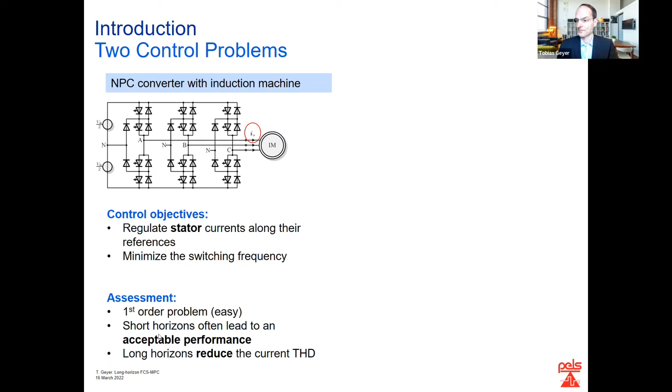Maybe more interesting are problems that are a little bit more complicated. Problems where you put a filter, a sine filter, an LC filter between your converter and your machine. You can also think here of having maybe a transformer. You would have the transformer impedance and then a point of common coupling would be an equivalent problem. And here you need to control 3 quantities in alpha, beta, not just one quantity. So this is a more complicated problem and also more interesting.

And here we will see that long horizons really do make a huge difference. So they lead to an improvement of a factor of 10, so an order of magnitude, compared to a horizon of 1.

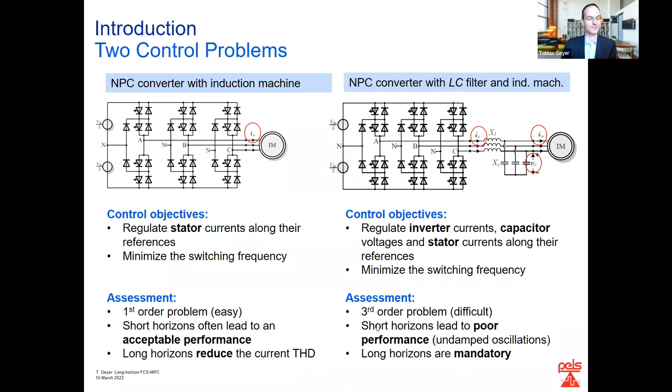Now, the way we usually formulate and solve these control problems is we say we have an inner current loop. That is typically formulated in a rotating coordinate system. Let's call it DQ. So we need to know the angle of a rotating coordinate system. So we would have a D-axis and we would have a Q-axis. And this would be rotating at a certain angular speed, omega frame. And that turns AC quantities into DC quantities.

So that means here we have sinusoidal quantities. That's a bit awkward to control, to track. But here we have DC quantities. And these DC quantities we want to bring towards their references. References would have a star. So this is always, in my nomenclature, a reference. And then we have here a current controller working in DQ with 2 components.

And usually we have one for the d-axis and one for the q-axis, and then there's some cross-coupling, some decoupling with some feed-forward terms. And that gives you a voltage reference in dq, which we translate back into ABC, into the three phases. And then we have a modulator, pulse width modulation, that translates this into switch positions. So these would be the switching signals in the phases A, B, and C. So I'm using the Anglo-Saxon notation. U means switch position, V means voltage, and U is not a voltage.

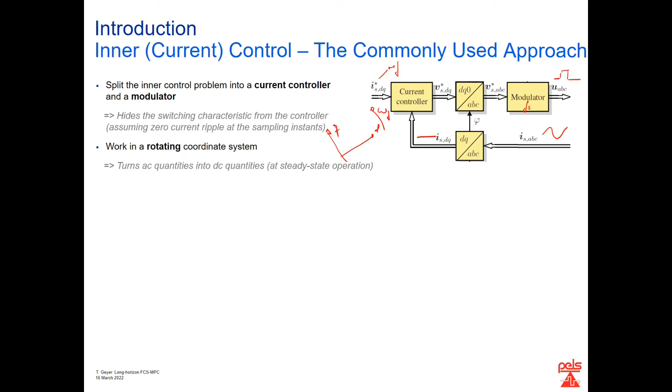Now the way we do it is we typically formulate the current control problem in a rotating or field-oriented control framework. So I've indicated already up here, but you have the same down here. And on the machine side, we would have a rotor flux, and the d-axis is aligned with that rotor flux. And then we have a magnetizing current that magnetizes the machine. And we have a torque producing current that produces torque. And you can have these current controllers as a proportional integral controller, or you can go for deadbeat.

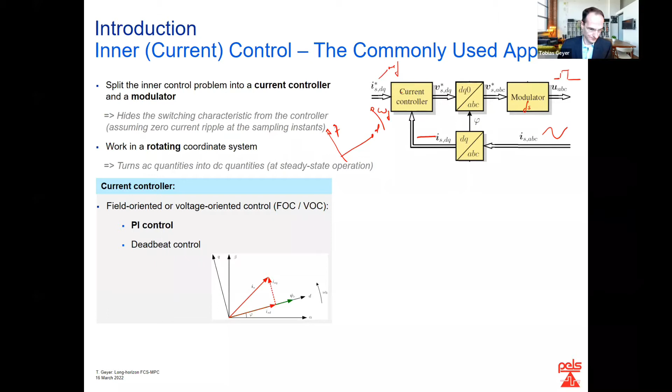Now, in terms of modulator, typically we would use carrier-based pulse width modulation. So we would have, in case of a 3-level converter, an upper carrier, triangular shaped, and the lower carrier, triangular shaped, between -1 and 1. We would have a reference signal, this modulating signal here. This we would feed in here. And whenever we have an intersection with natural sampling, we would have a switching transition.

Now, space vector modulation is similar. We just don't have carriers, but we sort of analytically compute the on and off times for the respective voltage vectors. Or we could go for discontinuous PWM, where we would maybe freeze the switching here when the current, let's assume power factor 1, when the current and the voltage is high, and we would also freeze switching here. So one phase would be frozen and the other 2 phases would be switching. You get lower switching losses, but you pay a bit of a price in terms of harmonic distortions.

And then there's programmed modulation. So most notably, there are optimized pulse patterns. That means we have a very different approach. We say we have a modulating signal. We have a modulation index, sort of an amplitude of the voltage we would like to create. But we then say we have a certain number of switching angles, let's say 3 over the first 90 degrees. And then we ask ourselves, what is the optimal position of these 3 switching angles so that we minimize the harmonic current distortions. So we compute with an optimization problem the position of these 3 switching angles so that we minimize the harmonic current distortions for this given modulation index.

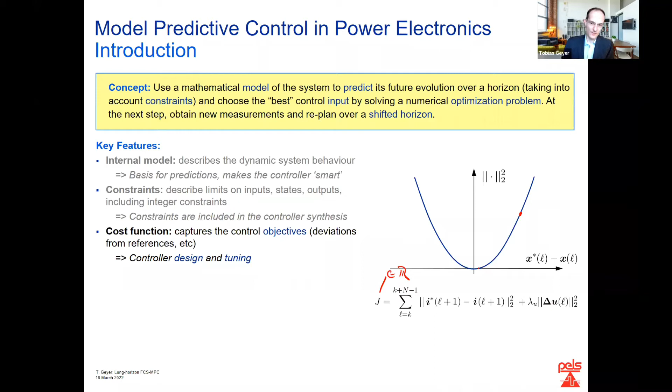And we might say that a small deviation, a small error here is penalized very little, so almost not at all. But a large error, we could say, is penalized a lot. So this is a sort of quadratic cost function. We don't care much about small errors, but we really want to avoid the big ones. And then we have this term here, which effectively tells us that the changes in the switch positions, which is the switching frequency in a way, should also be small. So this does the tuning of the controller. So we might have to tune this lambda here.

And then there is numerical optimization. So in general, we are not able to analytically, in the form of equations, come up with a control law. We need to solve it step by step. That means we have a certain feasible set, a certain input space that is defined by our constraints. And we want to find the sequence of input variables we would apply to our system so that the cost function that tells us how well we meet the objectives is minimum.

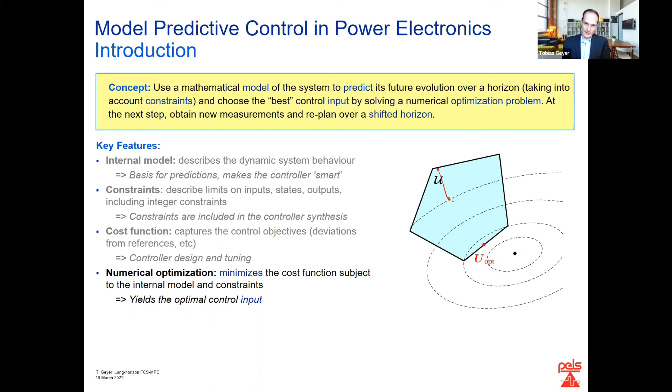So these ones here are level sets of our cost function. The closer we are to this point, the lower the cost, so the better it is. And we might start somewhere here and then move step by step orthogonally to this level set till we hit this constraint here, the bound of the feasible region. And then we know that, if certain properties are fulfilled, in this case convexity, that is then the optimal switching sequence.

And then we do this. So we formulate our problem over a certain horizon. Let's say we look 5 steps ahead or 6 steps. We compute the switching sequence or the sequence of manipulated variables over this horizon. But out of this long sequence, we only implement the very first element. So only the first element is given to our converter. And then at the next time step k+1, we make new measurements. We make new estimates, and we redo the whole thing over a shifted or receding horizon.

So you might say this doesn't make much sense. I mean, why don't I use all the rest of the control sequence? And the reason is simple. If you applied the whole sequence, you will only be able to act again here. So if a disturbance or something happens at this point here, you're not able to react. You have to wait till here. But with this receding horizon policy, if the disturbance happens here, you will be able to act already at the next time step. And you will see the effect this disturbance has caused by measuring or estimating the states.

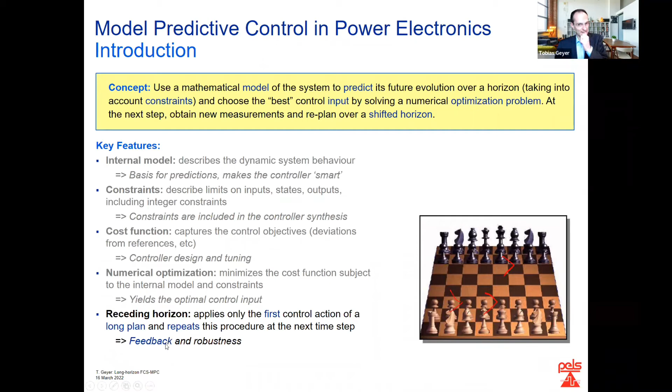So this receding horizon policy adds feedback. That's the difference to open loop control, where you apply the whole thing in an open loop fashion. Here you apply the first element, so this is closed loop control, giving you feedback. And that really gives you robustness. If your parameters are not perfect, if your model is not perfect, if you have disturbances, you will be robust to these disturbances. You will be able to counteract them. Okay, so that's the basic philosophy of MPC.

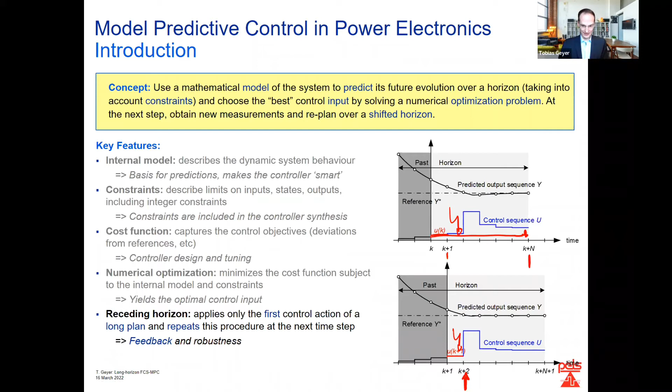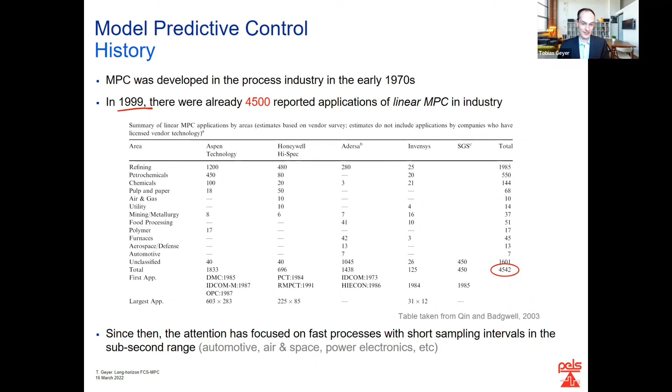The main reason maybe is that the sampling intervals were really long here. They were in the range of minutes, tens of minutes, in some cases even half an hour. In the automotive, air and space industry, we're talking about tens or hundreds of milliseconds, and power electronics is in the range of a couple of microseconds. So we needed a tremendous speed up in computation time.

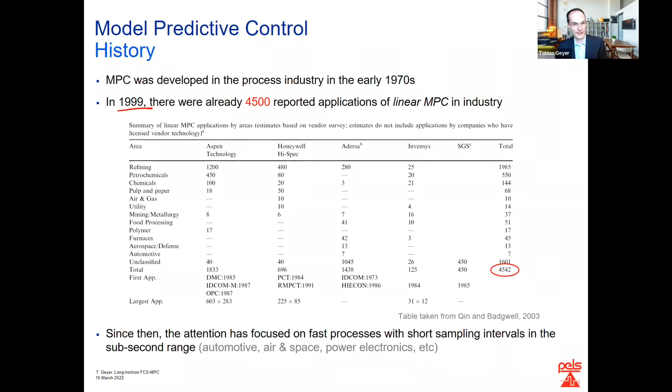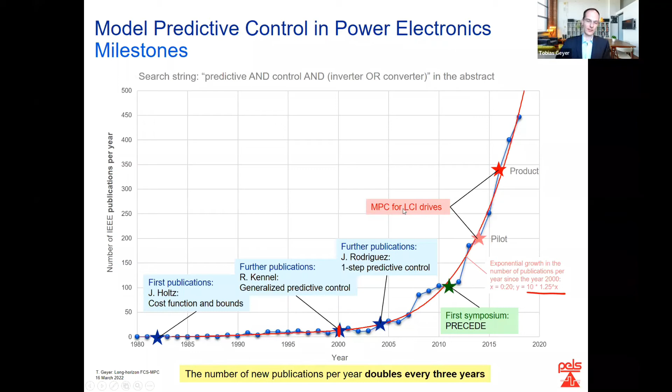They have nothing to do with finite control set MPC. This predictive control of load commutated inverter drives is a very different method. We control the rectifier and the inverter in one shot, and directly manipulate the firing angles of the thyristor bridges. Then there is model predictive pulse pattern control, the second predictive control product in industry. Again, it has nothing to do with finite control set MPC. Rather, it is based on optimized pulse patterns, which are pre-computed and then tweaked online by modifying the switching instants.

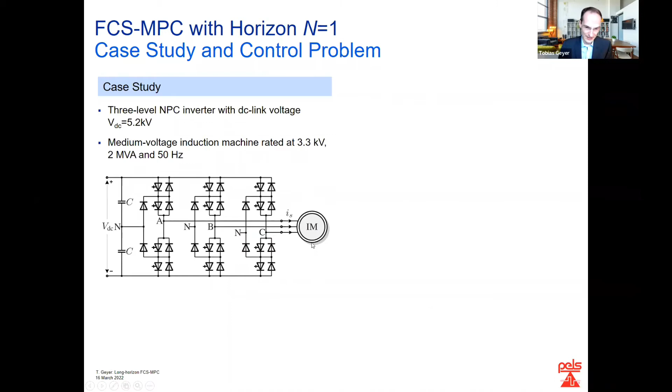Good, so let's start with the simple version of finite control set MPC with a horizon of one step. And again, we look into this case study, this 3-level neutral point clamped inverter driving this induction machine. But a 2-level inverter and any other machine would be equally fine.

And the problem is that we want the stator current that we measure to follow its reference, that would be a sinusoidal reference at steady state, by manipulating the switch positions in the 3 phases A, B, C. So we need to make here a choice of -1, 0, and 1 in the 3 phases. And we don't want to switch too much, particularly not for these high power converters.

So the way to do it is we simply say, I want to map what I want to achieve into a cost function. And what I want to achieve, I want my currents to follow their references. So I penalize the predicted deviation of the currents at the next time step. We are at time step k. The next time step is time step k plus 1. This deviation from the reference is penalized.

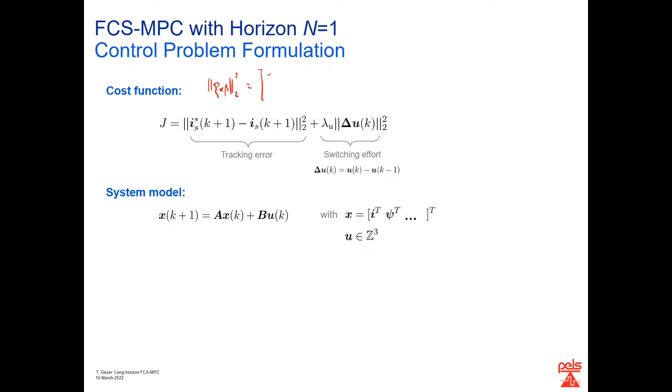And you might ask yourself what this squared 2-norm is. That really just means if you have a variable xi, let's say in alpha beta, so you have xi alpha and xi beta, and you take the squared 2-norm, that means you take the first component squared plus the second component squared. That's all it does.

I'm not sure why my tablet produces these horizontal lines. I'm sorry, they're not meant to be there.

So we want to get the tracking error small, and we want to switch little. And switching means between the previously applied switch position and the switch position we're choosing now, we want to have as small a difference. So when we reapply the same switch position, this would be 0. If we switch in one phase, this would be 1 times lambda u. If we switch in 2 phases, this would be 2 times lambda u.

And you see already we need to come up with a lambda. That is the trade-off between good tracking and low switching. And in general, you can't have both. So we need to come up with a good lambda.

Now the system model, you can pick any model, any load, any converter you want. In this case, I assumed it to be linear, but it does not need to be linear. So it's a simple state space model. Given the states now and the input now, we can predict what the states at the next time step will be. Could be currents, could be fluxes, could be capacitor voltages, and so on.

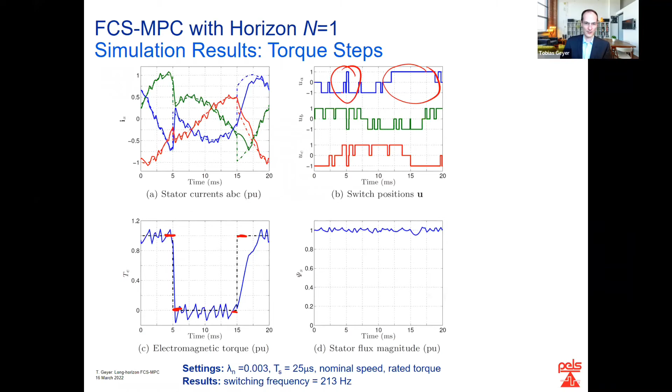You have here your torque, and you have here your switch positions UA in phase A, in phase B, and in phase C. And that torque step is there to be applied. Should be coming up now. Now the torque is being ramped down. That happens very quickly. We're at zero torque, and then the torque step back upwards comes, and that is a bit slower because of the lack of voltage margin. But you see already the prediction horizon is so short that it's actually a bit of a surprise that this works well.

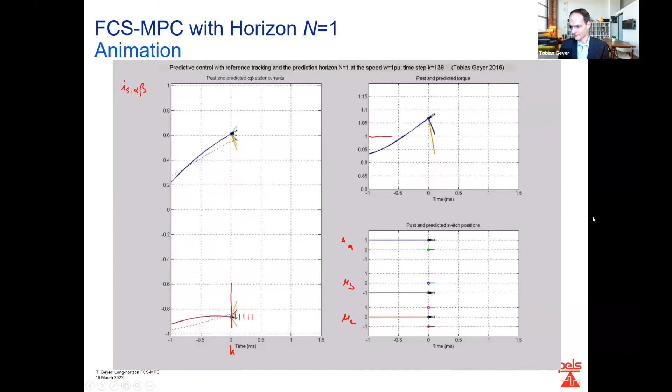Now, summary: horizon 1. Prediction horizon is 1. We use a load or a machine model. We use a converter model. This lambda u provides a trade-off between tracking and switching. It is very simple, both from a concept point of view as well as computationally, because you just try out all the different possible options you have. It is extremely versatile, so you can use it for any problem, any topology, any control objective you have.

But it doesn't work in some cases so well. So its performance in general is fairly average. In many cases, it is worse than classic modulation using carrier-based pulse width modulation. So we need something better. And the something better is finite control set MPC with long horizons. So let's look into these long horizons.

And first, let's understand why it's difficult to have a long horizon. So we have the same problem formulation here. We want to track these measured stator currents and move them along their references and directly manipulate the switch positions. So we do that in alpha and in beta over the time axis. And let's assume we are at these points here.

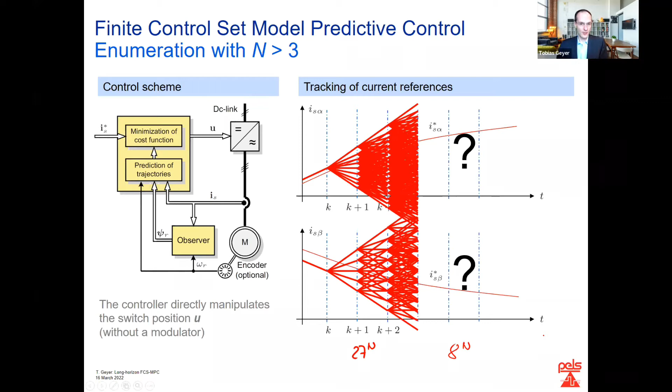So we get this combinatorial explosion. So we have 27 to the power of n combinations, where n is the length of the prediction horizon. Okay, you say, I'm interested in 2-level converters, then you would have 8 to the power of n. It's almost as bad. So this is hopeless. So it's a hard to solve optimization problem. I mean, you have an exponential increase in the computational complexity as you increase the length of the horizon.

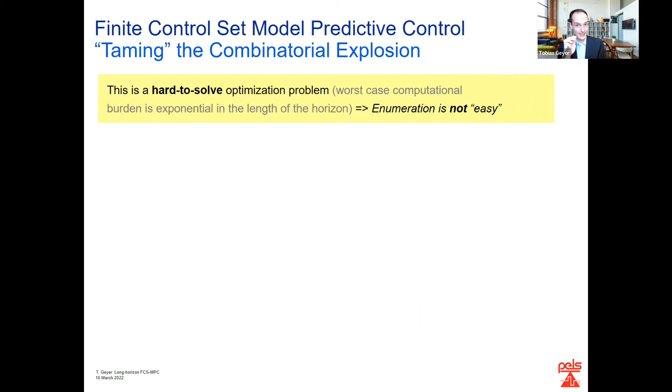So enumeration is difficult. Enumeration is not easy. Trying out all the possible solutions actually leads to a very difficult optimization problem, unless you have a horizon of 1, then it's very easy. So we can apply heuristics. So we can try to limit in an ad hoc manner the number of switching sequences we have to explore.

There are different ways to do it. You could say, I'm happy with a horizon of 2. I could only consider switch positions that refer to voltage vectors that are close to an ideal one. So I could say that I have in alpha and in beta such a hexagon of voltage vectors, and somehow I determined that I'm in this modulation region, in this little triangle. So ideally, I would like to be here. You could say, then I just need to look at this one, that one, and that one. You can do that.

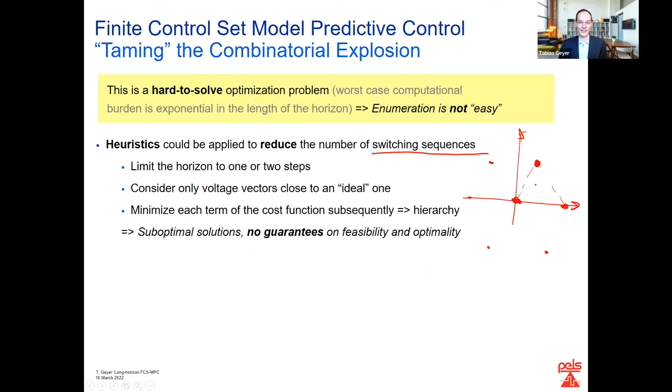You can try to have some hierarchy. You can try to minimize first one part of the cost function, then another one. But in general, there are no guarantees that this problem can be solved, and there's certainly no guarantee that this is done well. And well means optimality. So you will give up optimality and you don't really know what you get. And it's easy to construct counterexamples. So for each one of these methods, you can create a case where you can actually show that this idea is really bad, even though in general they might work.

So the question is, is there a better method? Is there a method to solve the long horizon finite control set MPC problem where I have a guarantee of optimality and I have a low computational burden? And the answer is yes, as you can imagine. And it's called sphere decoding. It's a branch and bound method, and I will now present this to you.

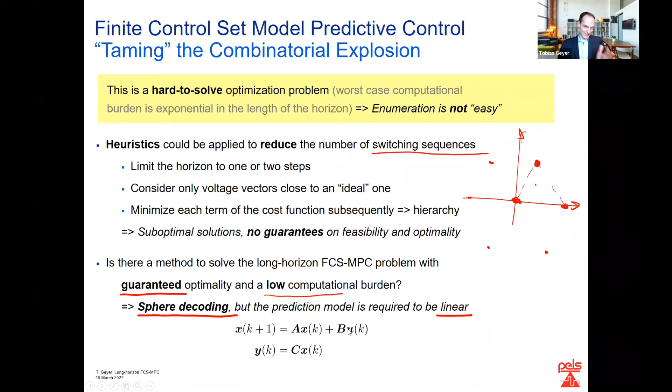There's one little footnote, and that is the prediction model is required to be linear. So you need to have a linear state space representation with matrices A, B, and C. You can't just have here a nonlinear term. So that is a restriction. I would say it's a significant restriction. But if it is linear, or you can formulate it as a linear problem, then there's sphere decoding.

So let's formulate these long horizon MPC problems. And let's ask ourselves first, are our problems more linear or are they more nonlinear? So is that really a problem that we have a linear system representation? So pick a system. I would say these components in here, they are effectively linear. The inductor is more or less linear. The capacitor is linear. Maybe there is some saturation of magnetic material. Maybe the torque is nonlinear. But the majority is really, it is mostly a linear system.

We have multiple inputs, multiple outputs. So you have your switch position in phase A, B, and C, and you want to control currents and voltages, or currents or fluxes. So a MIMO, multiple input, multiple output system. MPC can handle that well. The main nonlinearity we have is the actuation. So these switch positions, these on-off, this 1, 0, and -1. That is our nonlinearity, at least I would claim that. So it's a nonlinear system, or mildly nonlinear system, with integer inputs.

It is accurately known. We do know our system. Maybe not when we are grid connected, then we have to maybe estimate the grid impedance. But in general, we have built this filter, we have built this machine, we have a fairly good understanding. Typically, we have less than 10 state variables, and typically we have 3 variables we manipulate to achieve our control objectives.

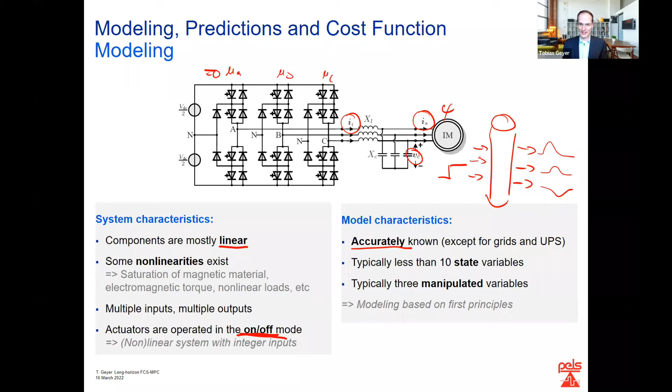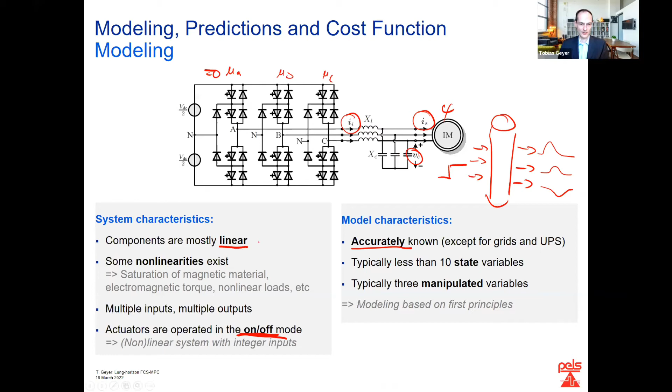And you don't have just 10 state variables, you have hundreds of thousands. So highly unknown models with lots and lots of state variables. In contrast, we have almost a heavenly, a blissful situation with just a few states and a fairly well-known, almost linear model, except for the on-off characteristic.

So what we do is we do these predictions. We work with the discrete time axis, and we have our state space system. So we have a certain state, we have measured it. Let's take a tentative input. This notation means U of k; it's just a more compact notation. This is the switch position at time step k. This is the state at time step k.

So given this input, I can make a prediction what my states are going to be after one time step. And these are always vectors in general, not just one component, but 10 or so. At the next step, I can ask myself, if I have now predicted the state and I'm going to apply the switch position, I can make a prediction what the next vector of state variables is going to be like.

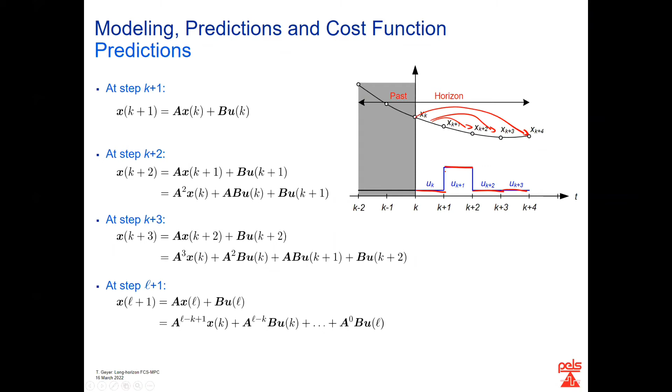And then I can put the previous prediction into this one here. And then I can get the mapping from the initial state to the state at time step k plus 2 using switching at time step k and k plus 1. And this I can repeat. So given my inputs, which I have to choose, which I will optimize over, I can make a prediction what future states are going to be, and if you have the states, you can also compute what the outputs are going to be like. The outputs are then simple linear combinations of the states. Okay.

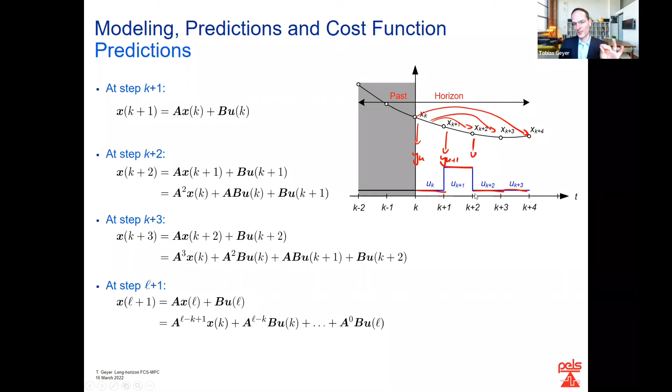Now it's important to understand how you can model and how you can predict the future. Then we want to see how do we choose these switching sequences? What is optimal? And for this, we need a cost function. The cost function maps what we want to achieve into a number, into a scalar, into this J. Commonly used cost function terms could be the deviation of the predicted current from its reference, let's say at the next time step. And there's a simple physical underpinning under it.

So this is here in alpha beta, but in general, in the A axis you want as small a current ripple as possible. In the B axis, you want as small a current error. And in the C axis, you also want to have a small current error. And you can show very easily that minimizing the current error in A, B, and C is the same as this cost function.

Well, maybe if you don't mind, hello, could you mute your mic, please? Naman Singhal, can you mute yourself? Naman Singhal, can you mute your audio?

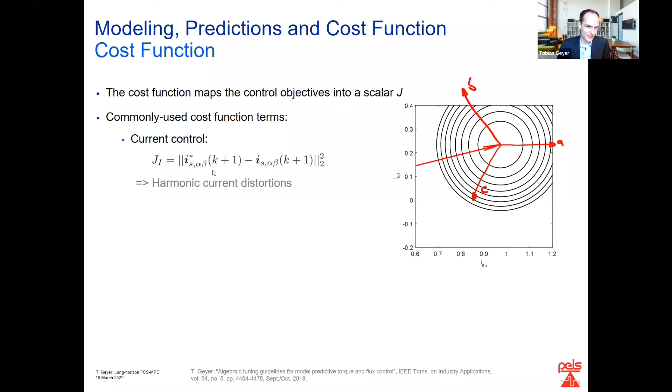So we want to get the ripple in phase A, B, and C small. And this directly leads to this type of cost function. So you get these concentric level sets. You want to get the deviation in alpha beta from the reference as small as possible. So this minimizes your current THD. You could also say, I'm interested in the torque. So I want to follow a torque reference, or I want to follow a stator flux magnitude reference. So this could be a direct torque and flux control. This could be a direct current control.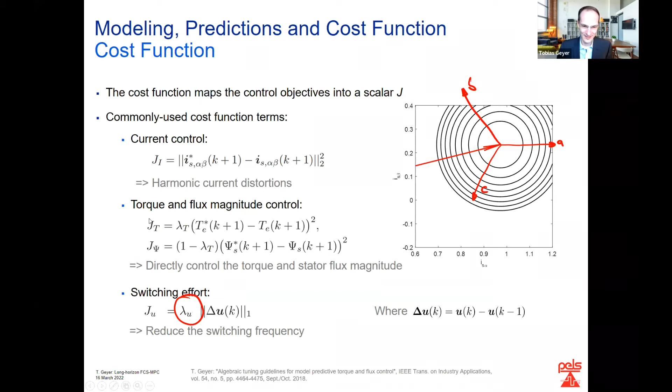And then you want to get your switching effort small. This we have discussed already. So you need this penalty on switching. Maybe coming up with a good cost function is not so easy, but usually you can base it on physics. I mean, you can start with a THD, or you can say, I want to have good torque and flux magnitude tracking, for example.

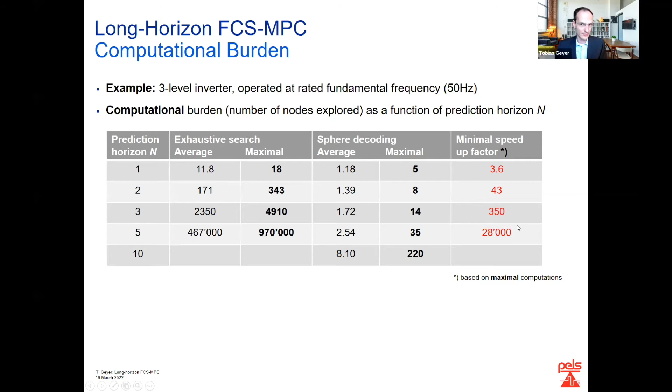And you also see it here when you do this prediction horizon and you use the classic exhaustive search. So for a horizon of 1, we would typically need to look at 18 elements, not at 27, some are not allowed. Horizon of 2 might be 340, 3, 5,000, 5, a million, and then I was not able to compute things anymore. But with this sphere decoding, it's just a few. So you get a tremendous reduction in number of nodes, so a tremendous reduction in computation time.

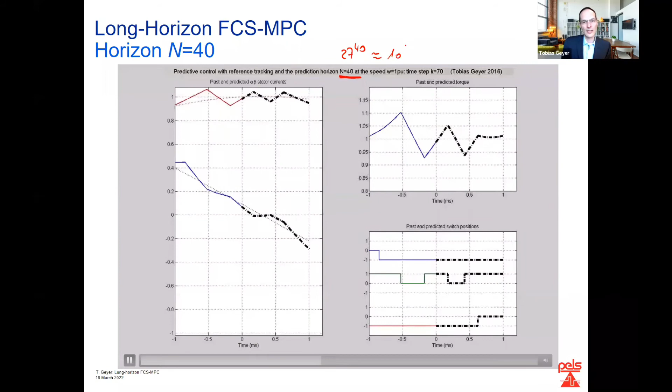So how does that look when you use it? This is an example with a horizon of 40. So we have 27 to the power of 40 combinations. That's maybe something like 10 to the power of 80 combinations that we can solve here in a couple of tens of microseconds. You see here we are at time step 0. We have a sampling interval of 25 microseconds. We have 40 steps. So the length of the prediction horizon is 1 millisecond. And you see this receding horizon policy in action. Effectively, it is nicely moving through. Because of the switching, every now and then we have a discontinuity. We add a switching transition or we remove one, but largely you see it nicely moving through.

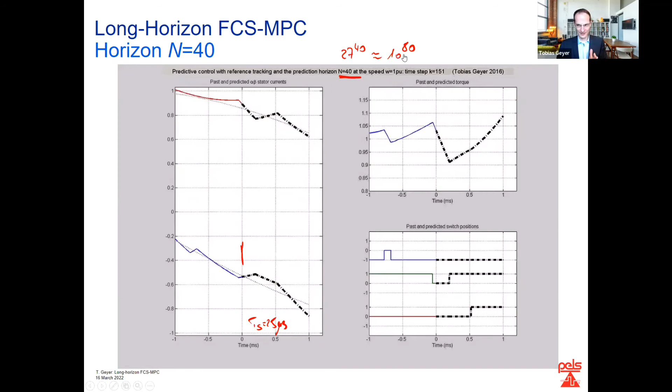Now, this number of combinations, this 10 to the power of 80, that's the number of atoms in the observable universe. So that's an incredibly, incredibly high number. It's absolutely impossible to try them all out. But with the sphere decoding, we have proof that we have found the optimal solution by just exploring a few tens of those choices.

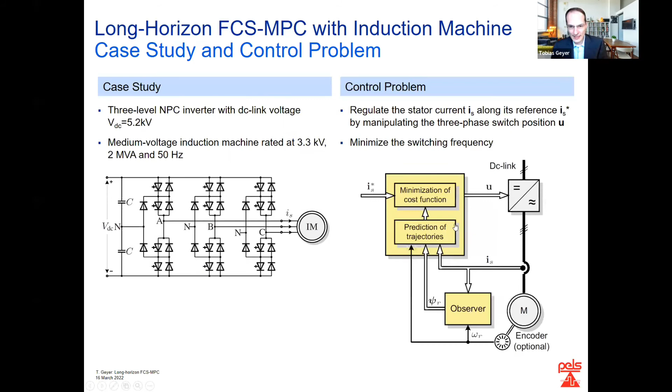Now, if you apply that to induction machines, like this example we have had previously, and we have here the tracking of the current, you compare it with the state of the art, in this case, let's say space vector modulation. So omega means nominal speed. Let's say 50 hertz fundamental frequency, nominal torque, switching frequency of 250 hertz. You see this carrier-based or space vector modulation doesn't look so good. I mean, the current THD is quite bad. The harmonics are huge. These are sidebands, but the carrier frequency is at 450 hertz. So it would be here. So these would be sidebands, but it's hard to distinguish them.

You can go for optimized pulse patterns. You can almost halve the current THD while having the same switching frequency. So we just switch in a bit of a smarter way, and it has a tremendous impact on the current ripple.

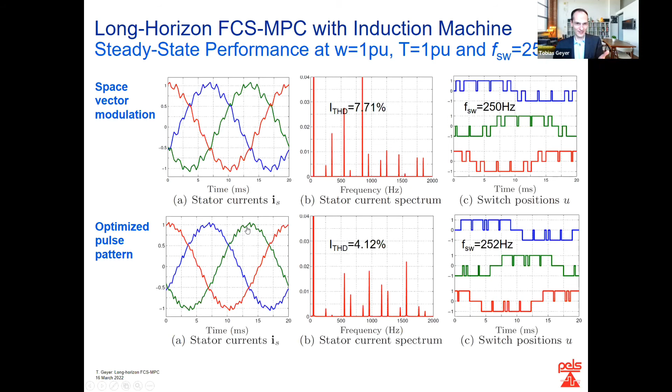So these ones I will maybe skip in the interest of time, but what I effectively want to tell you is that tuning is a bit tricky because you have two things you need to tune. You need to tune the penalty on switching, the lambda u, and you need to tune the sampling interval. Both are effectively parameters. And if you just do Monte Carlo simulations with a horizon of 1, you're typically worse than space vector modulation. You need a horizon of 10 to be as good as space vector modulation.

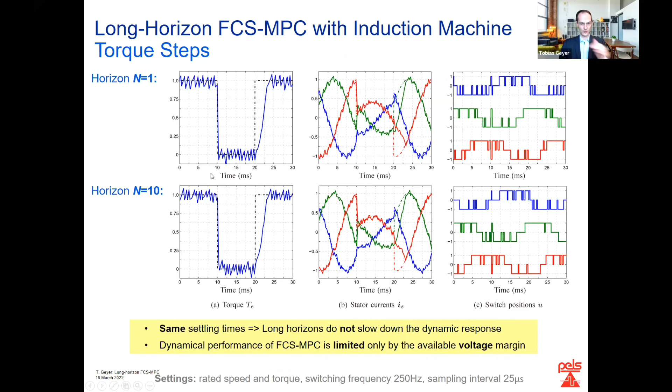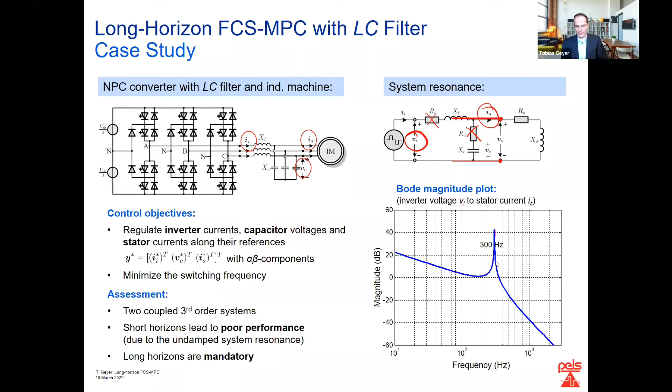And you see the transfer function from the voltage harmonic at the inverter to the stator current here has this resonance peak. In this case, around 300 Hertz, that's determined by the filter parameters and the leakage reactance. So you can imagine that this is highly undamped. So if we just apply the controller here without knowing about that resonance, we will get huge oscillations.

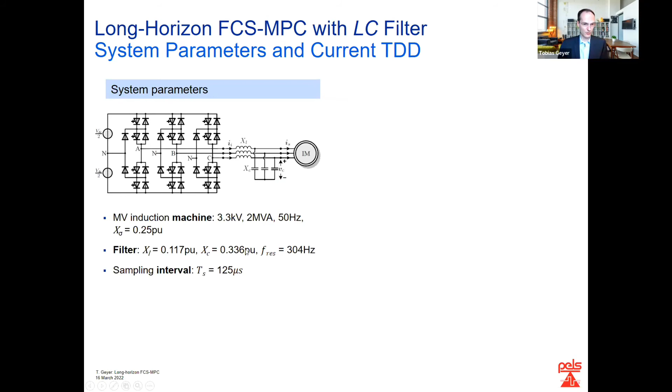Now, I picked some parameters for the filter. These are typical parameters we would be using. I have a relatively long sampling interval. And if I then plot the current THD versus the switching frequency, and I go for a horizon of 1, you see it works really badly. You need, at least for this case, a relatively high switching frequency, and you get a really high current THD at the terminals of the machine.

A horizon of 5 helps a lot, and the horizon of 20 helps even more. So you get here a reduction of almost a factor of 7 to 8. A tremendous improvement. Effectively because the damping is taken into account by your controller. So long horizons really, really help in this case.

So you see it here, you have inverter currents, they look awful. Capacitor voltages look okay, and the stator currents are really nice. It's effectively a very, very low current THD. You get the switch positions, very flat harmonic spectrum.

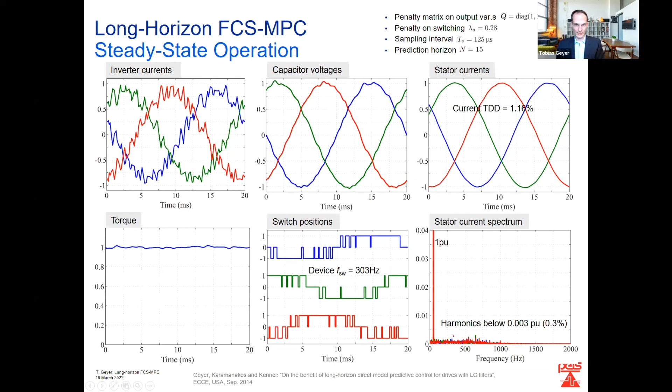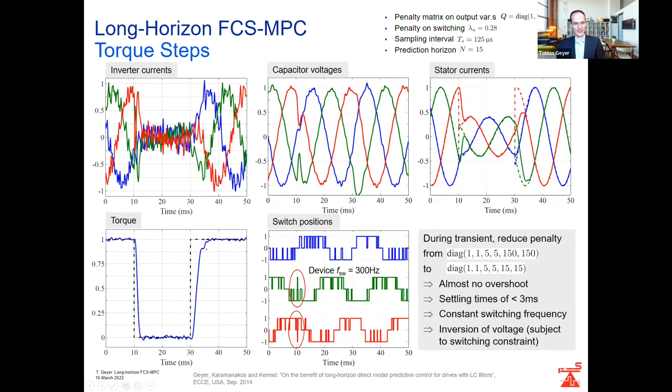You can get very fast torque steps, 3 milliseconds, despite this huge filter. And you sort of get here a bang bang behavior. So the current is high, it gets pushed down and up and then down. And this is really to change the state of energy in the energy storage elements quickly to bring down the torque.

So assessment for this long horizon MPC with the filter: sphere decoding exploits the problem structure, so it has relatively little computational burden. Part of the problem is solved offline using this generator matrix. Simple control, one loop, no active damping needed. Performance is good, we have low current distortions. We can operate at low switching frequencies. MIMO approach, multiple input, multiple output approach.

So excellent transient response. So let's look into this switching frequency. We had seen that the resonance is at 300 Hertz. So a traditional linear controller should operate at least at 900 to 1000 Hertz apparent switching frequency of the converter. Whereas here we can operate sort of around 240, 250 Hertz. So that means 120 Hertz per device because we have a 3-level converter.

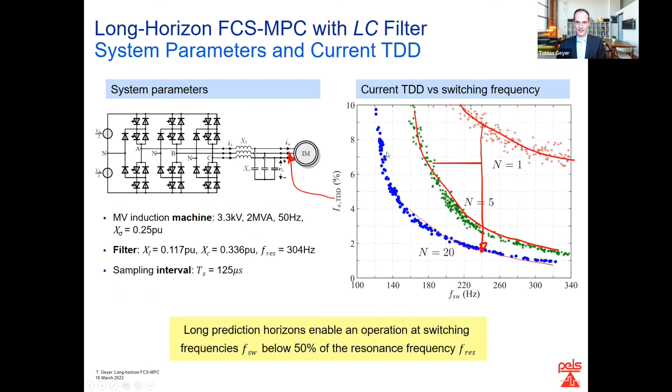So the switching frequency of each semiconductor device is here 120, 130 Hertz. For the converter, it would be 240 Hertz. So this is below the resonance, and that is a big, big surprise. So this we can really drastically reduce. Now, these are simulation results. I've not run it in the lab.

In the lab, there could be surprises. The delays would hurt. The model imperfections could hurt. So take this with a grain of salt. Maybe it's 300 or 400 Hertz we can operate. But I've seen in experimental results this 1000 Hertz being drastically reduced by similar methods.

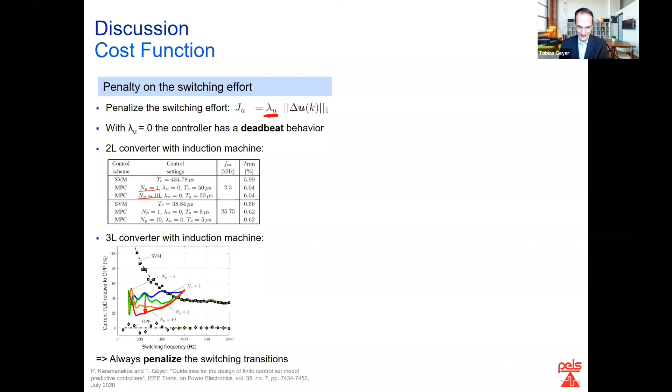But if I have no penalty on switching anymore, it doesn't matter. All horizons give me exactly the same switching because I have this deadbeat behavior. So always penalize the switching transitions.

Then the tuning. So you can compute a good ratio of penalties between the torque and the flux magnitude. You can try to make your level sets of your cost function for your direct torque and flux control as circular as possible. And you see they are almost circular, because you know that when they're circular, you minimize your harmonic current distortions. And that avoids tuning of penalty weights. So you can analytically compute what is the best penalty on torque and flux terms to get minimum current THD, but still have a direct torque and flux control.

And then you can try to avoid the penalty on switching you have up here by putting this into your cost function. So you can track the switching frequency in your cost function. So also no tuning is needed here.

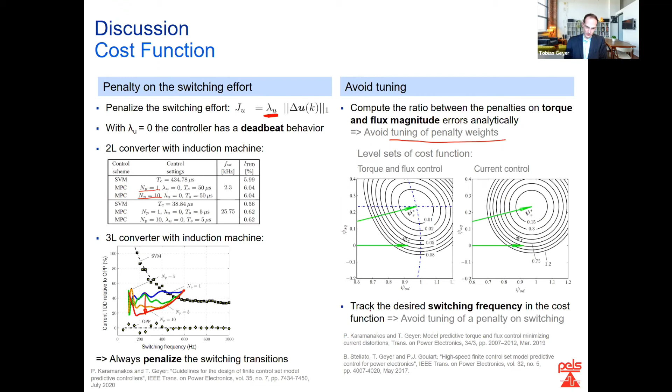Now, when should you use long horizons and when are short horizons good enough? So a two-level low voltage converter, trade-off current THD versus switching frequency, space vector modulation, short horizon, long horizon, you barely see a difference. So maybe you don't need it for these first order systems. Maybe horizon 1 is enough.

Then the harmonic spectrum we get is often a bit unfortunate. If you have a grid-connected converter, you might need to meet harmonic grid codes, let's say IEEE 519 or this IEC 61000-2-4 standard. And particularly strongly are the even order harmonics penalized. And this finite control set MPC just tries to track the currents. It has no knowledge about harmonics. So you will violate them.

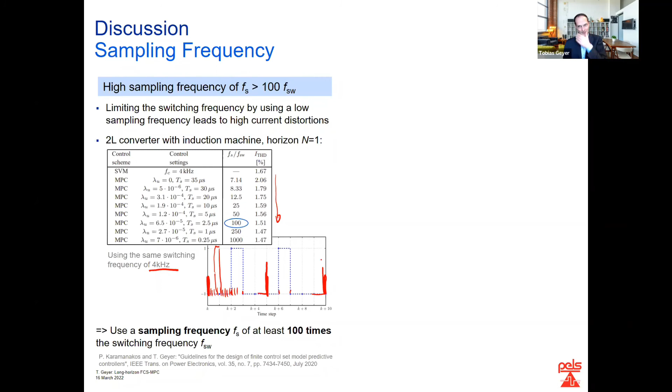So you need to finely grid your time axis so that your controller can sample and act at any moment in time, pretty much. If you have a very coarse switching, if you can switch only here and here and here, your controller needs to make a decision. Do I now switch here or do I switch here? And this will be reflected in high current THD.

So because of that, when you look into low voltage converters with a couple of kilohertz switching frequency, you might need a couple of 100 kilohertz sampling frequency. You might want to look into methods beyond finite control set MPC. You could say, I have a certain modulation cycle, and I allow a certain number of switching transitions within this modulation cycle. I want to compute these optimal switching times by minimizing the current ripple.

So this would be something like slope-based control, where you formulate a control problem that is very different to finite control set MPC. So you act at these discrete time instances here. So you have a low sampling frequency, but you allow your switching instances to vary smoothly. You're not artificially discretizing them as you do here.

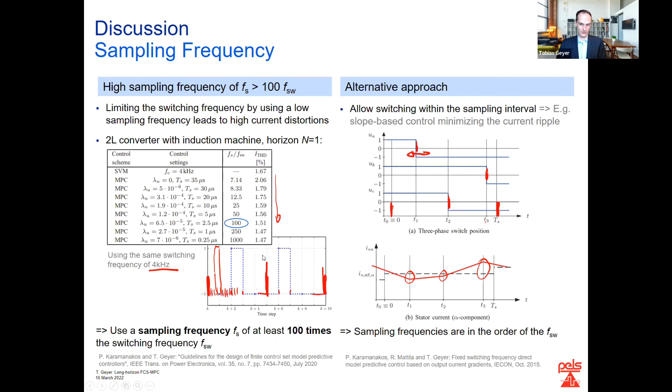Stability is a difficult topic. If you really wanted to prove it, you need to prove practical asymptotic stability, simply because you will always be switching. So you will not be able to control your currents to a certain value. You will always have a ripple. You will always need switching. So you can only keep things within certain bounds. So there's literature if you're interested, but it's mathematically complicated concepts.

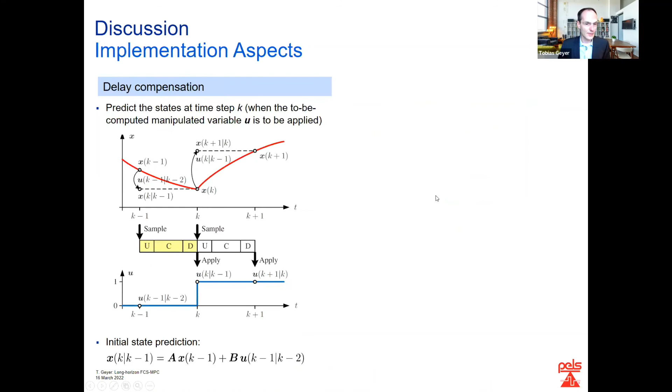And then you want to maybe compensate for delays by using your model. So you measure, you know that you have applied a certain switch position. You can make a prediction what the states are going to be when you apply your control input. So you measure, you communicate to your controller, you do this state prediction, then you compute your manipulated variable, you send it downwards, downlink, and then you apply it here.

But you do that based on the previously sampled state that you have mapped forward. So it is intended for time step k, and it assumes that it's intended for time step k. So you compensate for that delay.

And then there's literature on how to implement it. You can do it on an FPGA. So there is a non-recursive sphere decoder using pointers and a few tricks. So you can run the sphere decoder on an FPGA. You can use suboptimal solutions, pre-processing, some projections to really speed up the computation time for certain corner cases. We can discuss these details if you want during the next half an hour.

So, summary and conclusions. I have two or three slides left, then I'm done. We have been talking a lot about current distortions per switching frequency. I would claim that the product between the two, current THD and switching frequency, is a really meaningful and important metric, this constant. You want to get this constant down. So either reduce the current THD or reduce the switching frequency, or both.

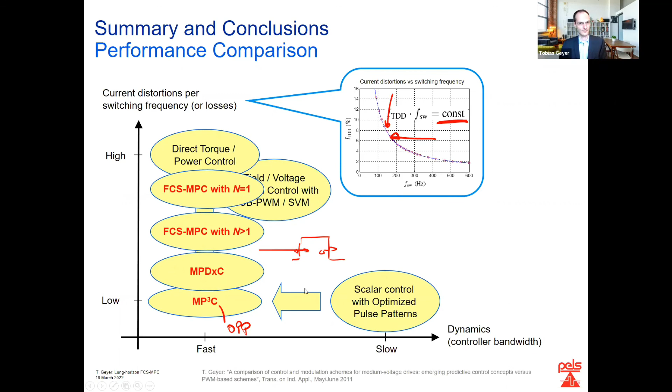Sphere decoding is a good method. You iteratively consider integer solutions. You get a certificate that you have found the optimal solution, so you're not approximating things in any way. You get the optimal solution. It's very efficient, but your problem must be the same at each time step, and you need to have a linear system with integer inputs.

This is the last slide. MPC in power electronics has created a lot of interest, predominantly in the academic community, but now people in the automotive industry are also getting interested. It's a potential differentiator and cost saver for industry. Maybe you're surprised, but I would say lack of computational power is usually not the main issue. It is usually that you need to get good performance. Computational power just makes it a bit harder to implement.

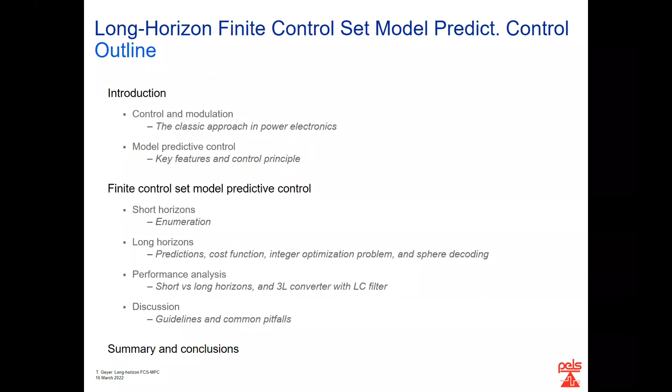No, you can pretty much use it for any system, because with the model we have, as long as you can model it, you can use it.

Yes. Okay. And so I just want to know what are the advantages that MPC offers over the other existing control systems, sir, like for the machines? I think that's a good question, because one should really ask oneself, what am I going to improve? What is it that is going to be better? Is it just going to be different, or am I actually going to make a difference?

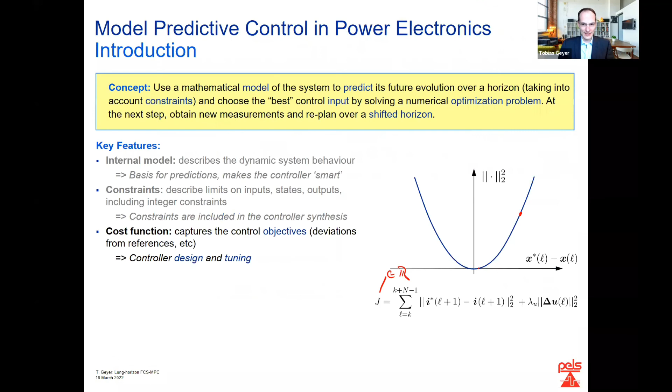I think it depends on the method a bit. What I've seen, this finite control set MPC really works well when you have these LC filters. It really works well for filters. And it really works well when you have an imbalance or asymmetry in your system. So when one phase behaves differently to another, when the D-axis is different to the Q-axis. This you can tell this controller relatively easily, and it would be very difficult to explain that to a classic modulator.

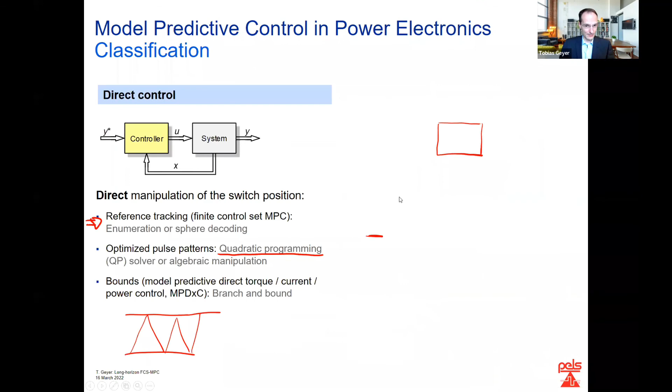Okay, sir. Thank you, sir. Now, if you just have a simple machine and you want to spin it, then maybe it's simpler. Let's say you have a simulation set up and you just want to quickly see how you can run your system. Then implementing such a one-step predictive control, effectively this algorithm here, would take you 2 or 3 hours. So it's really quick, and you can get something nicely running. Okay, sir.

In general, if you really want to push performance, I personally like optimized pulse patterns a lot. So I like to pre-compute the perfect switching sequence and then to modify it online to get feedback.